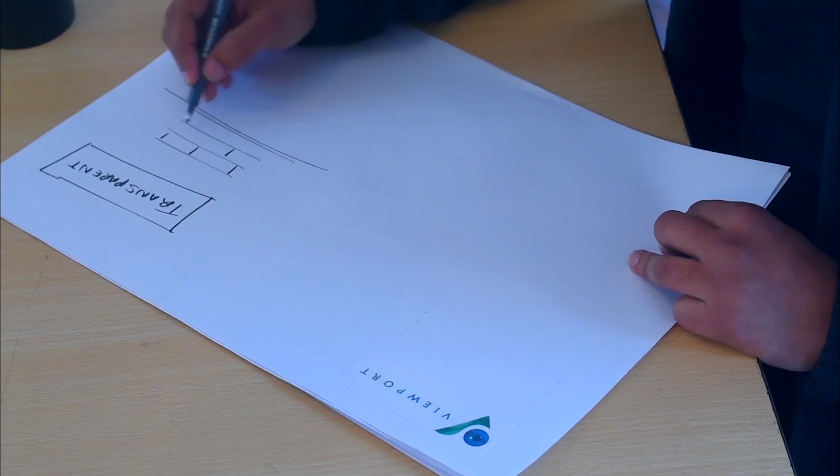जुनमा चाहिँ I wanted to explore with the materials, किनकि हामीले काठमाडौँमा या नेपालमा भनौँ न देख्दाखेरि चाहिँ fences are always these big walls of bricks, and they are all so monotonous. Maybe alikati naya element आयो भने चाहिँ there is a concrete band or maybe some barbed wires over it. I had to break this.

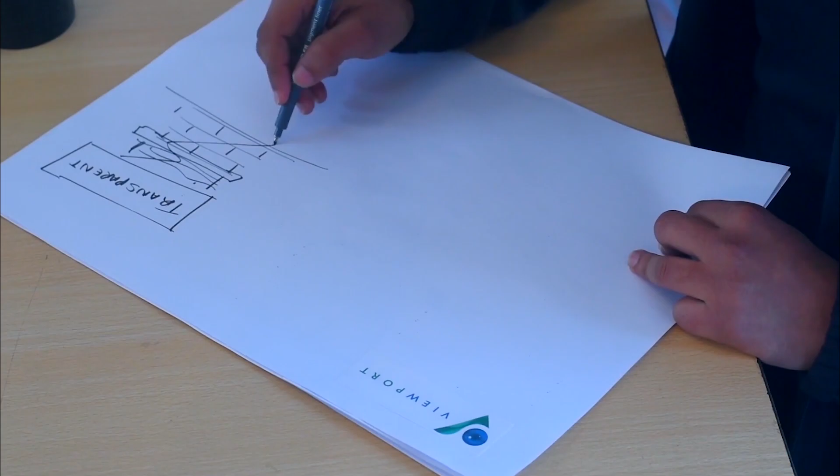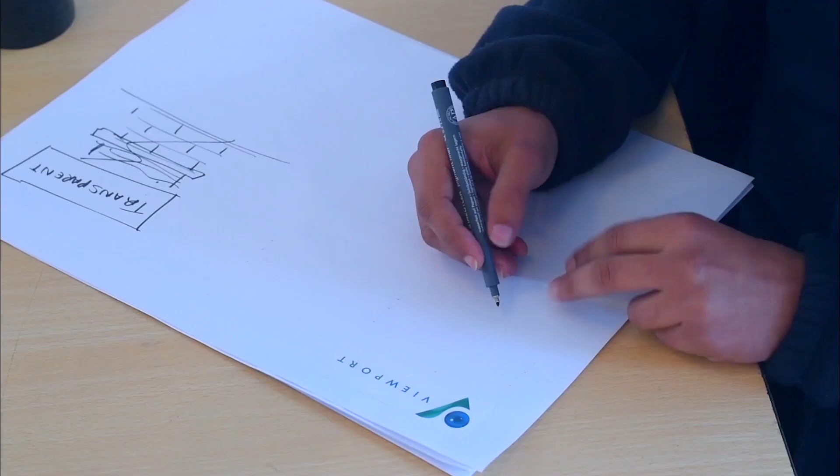अब यो break गर्ने कसरी भन्दाखेरि चाहिँ since we are in architecture school अनि the fence is in front of the architecture school, I wanted to bring out some creativity into it. अनि since it was my 4th year in architecture, मैले चाहिँ I looked back on my whole journey throughout the architecture school, and I felt like I had a really nice wave of life that had been going around the whole college.

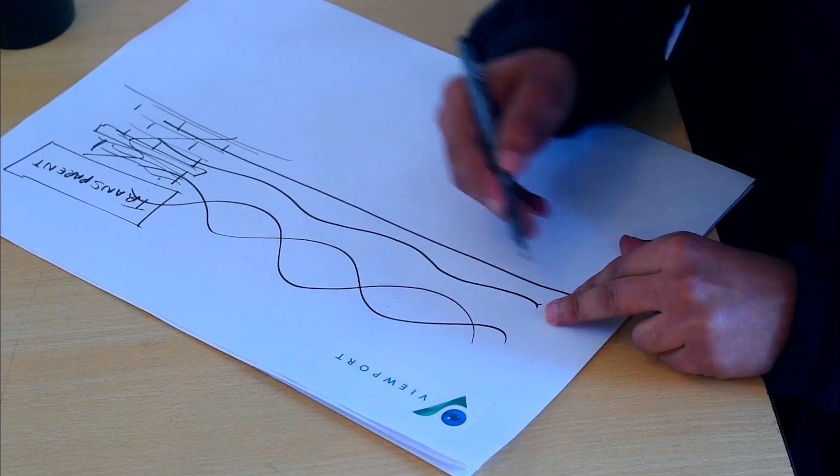There was also another wave of experience that was going when I was studying architecture in Pulchowk Campus. And I called it the wave of change, and then my whole design was based on that wave of change, where I added some more waves, and then this is what my core front view of the fence was.

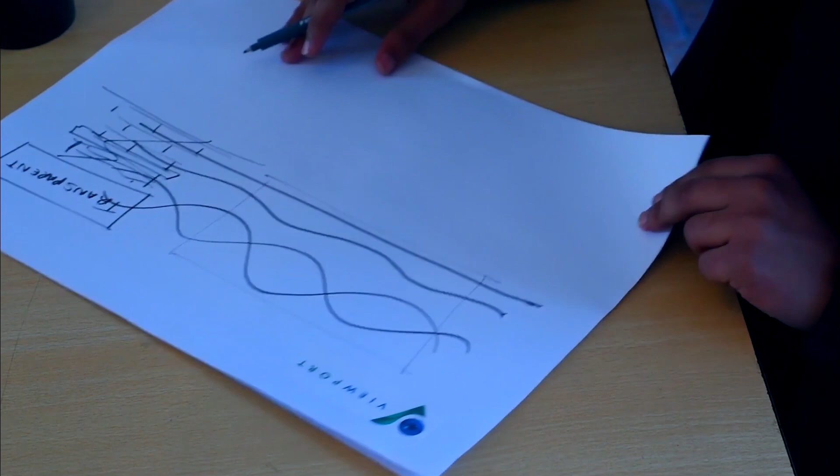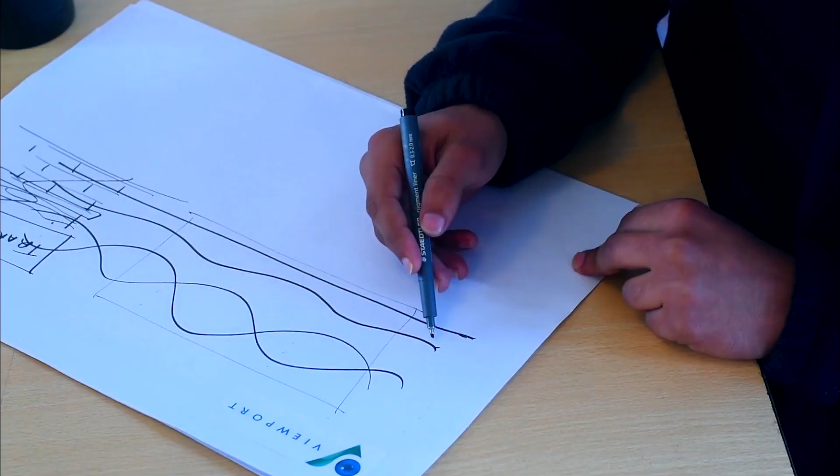त्यसपछि since I was going to add new materials to it instead of bricks, I searched into concretes and maybe steels. And there was another constraint by the organizers that the base of the fence has to be in stone. So यो सबै कुरालाई कम्बाइन गर्दाखेरि चाहिँ I had a feeling that I could make the structure like this through concrete, किनकि concrete is one of the flexible materials that is available in modern times.

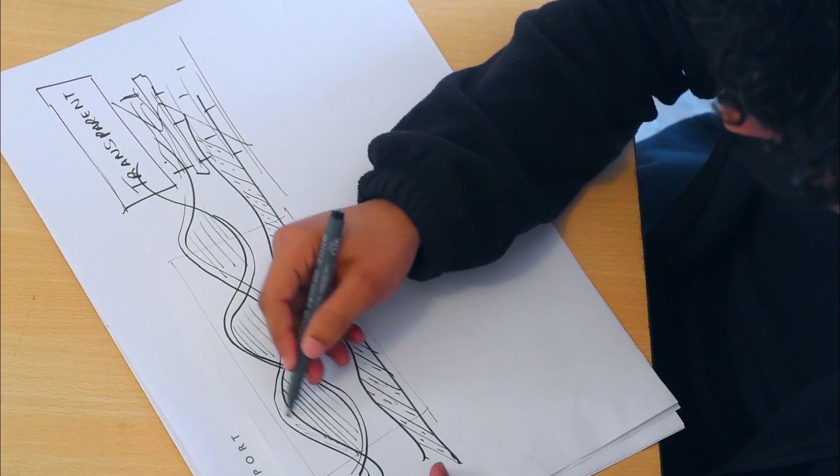So I had something that looked like a facade of my design.

These perfectly showed what's inside the fence and what's in the site itself. यसले गर्दाखेरि चाहिँ the pedestrians who are walking by could actually see what's inside.

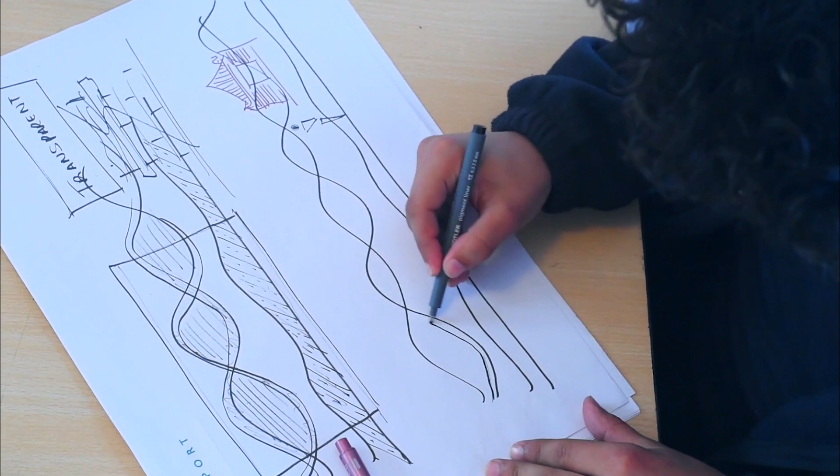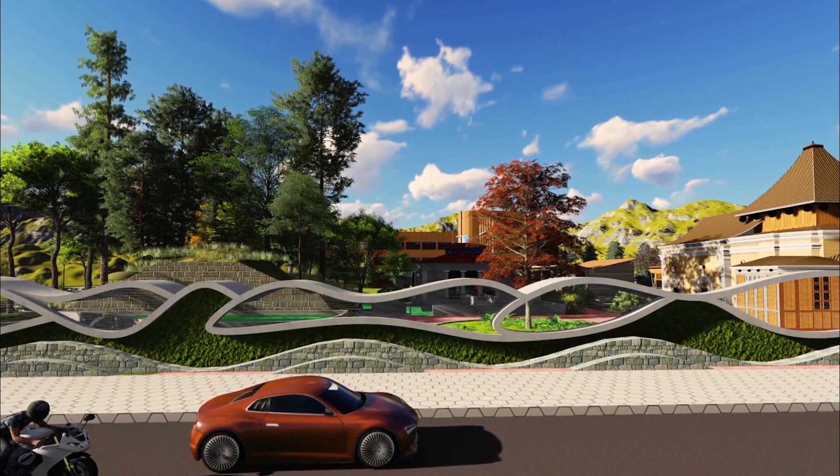Especially what I wanted to do was this: this is a concrete element that's coming that shows the wave, and then there's another concrete element that shows the wave again, and in this gap I decided to keep some horizontal steel members, cables let's say, which had the property of being transparent while giving the required amount of safety to the site.

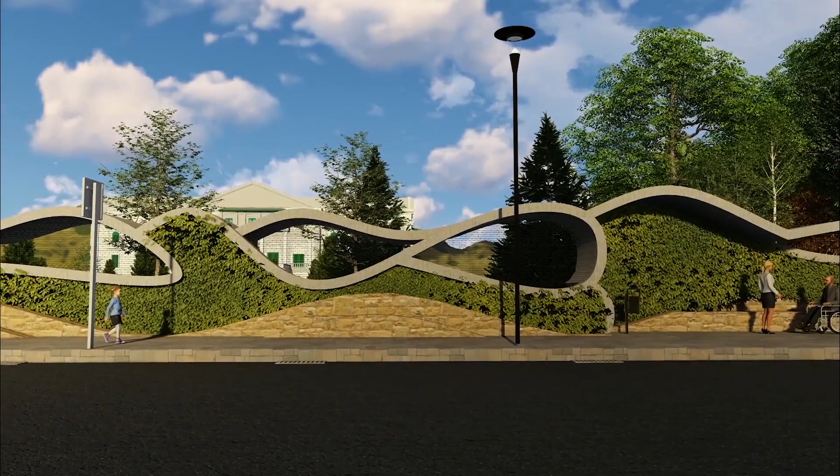And with the support of that mesh, there will be greeneries coming in the scene. So something like this, it's becoming a vertical garden, which pedestrians walking in front of the site could use as a visual element; seeing green while walking, it feels refreshing.

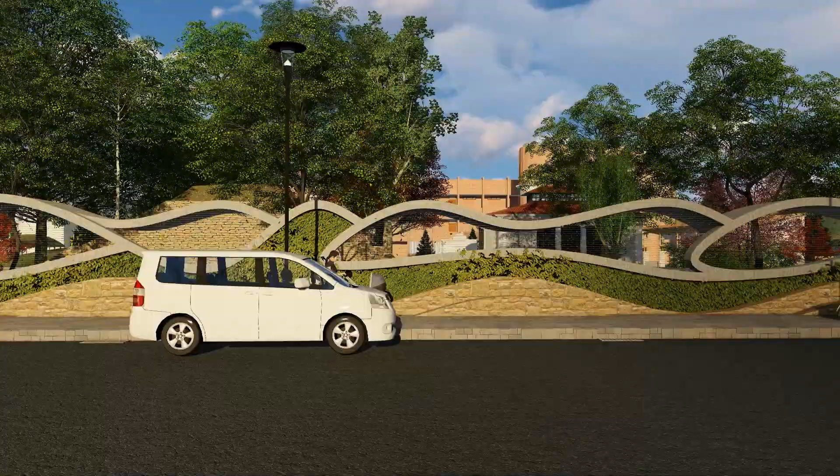Also our site has an existing amount of trees. There are a lot of trees inside, and since this is a transparent fencing, it shows that green feature of the site itself. So you could see green everywhere, something like this.

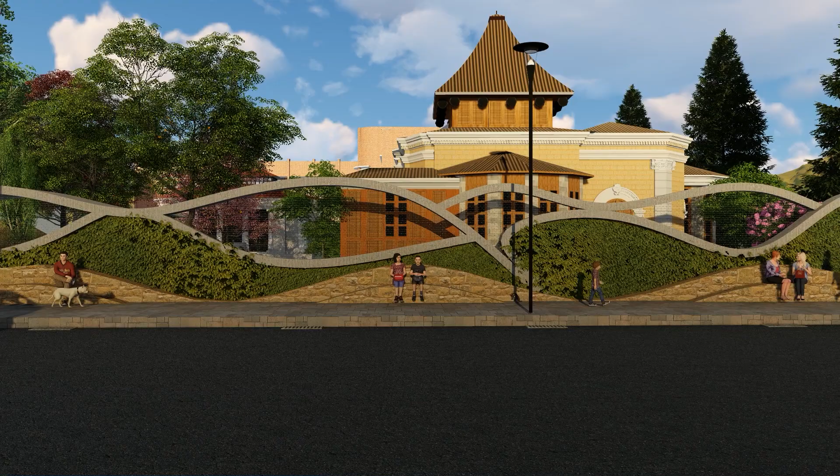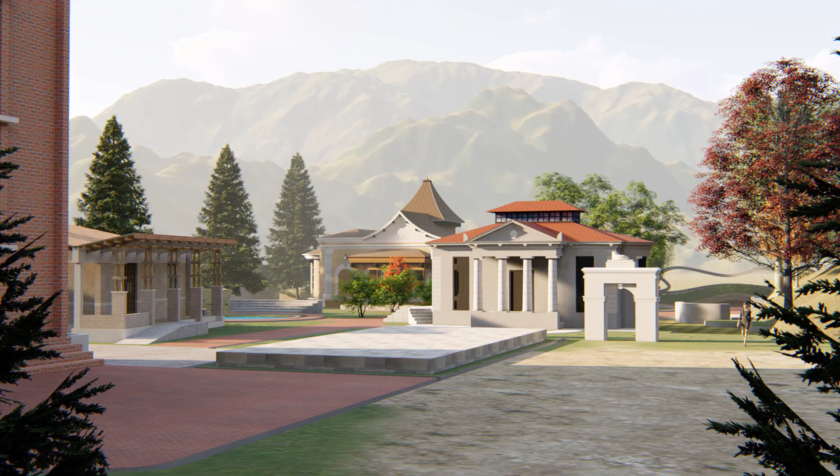Along with this, it's not just one pavilion; there are also many other buildings, like another building called the Summer Pavilion, made during the same era of Ananda Shamsher. This can also be seen from outside. Likewise, as an identity of Pulchowk Campus, there's the A block, the Ananda Niketan itself, which was Ananda Shamsher Rana's own residence.

That is also visible from outside, and this fence makes people able to see this building from the outside itself. So this can be an interesting element shown through the transparency of the fence.

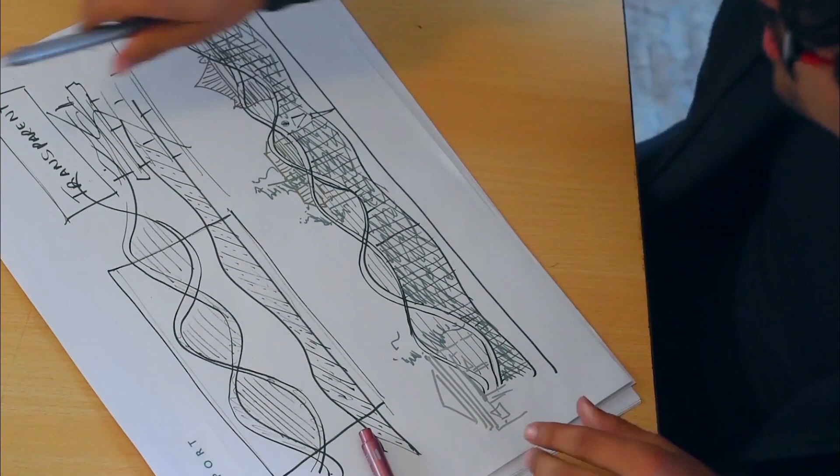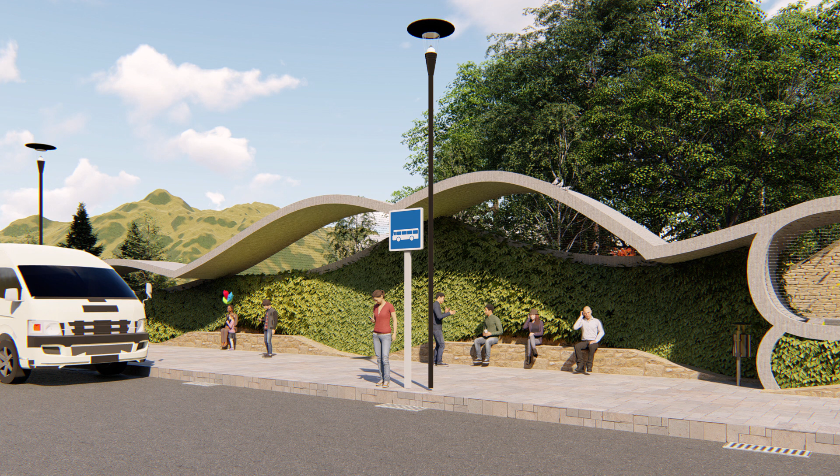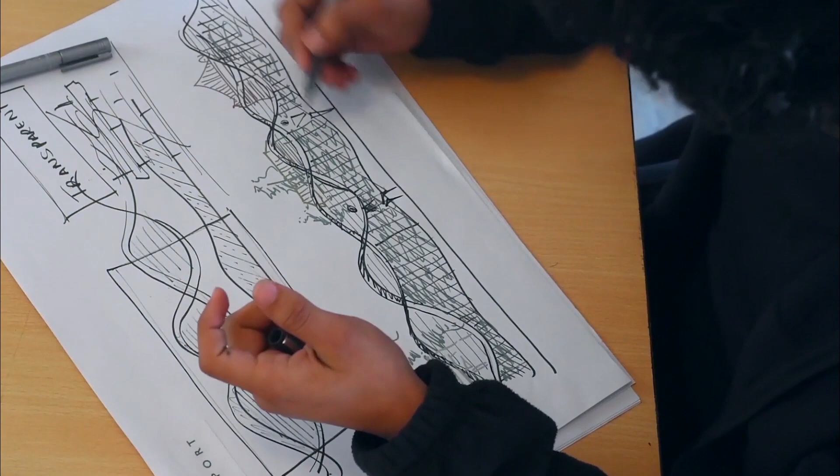Now these wave elements, what I did was I tried to incorporate them into some sort of shading device; they could protrude out of their own plane and form a shading for the people waiting for the bus. There's a bus stop of Krishna Galli right at the site, and I incorporated the fence into the bus stop where people can sit under the shade and wait for the bus, so we don't need a separate bus stop. So it's something like this.

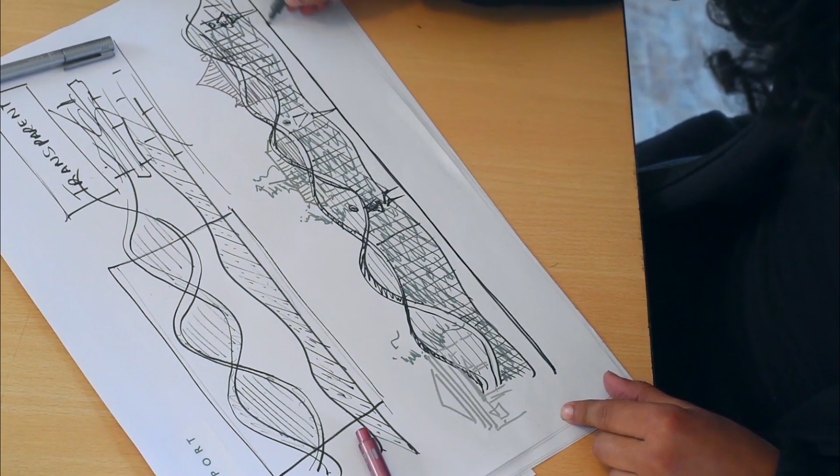So in this way I came up with this design where it is greener than what exists on the site. It shows what's inside the whole Department of Architecture. It shows the history of the change of era in Nepalese architecture.

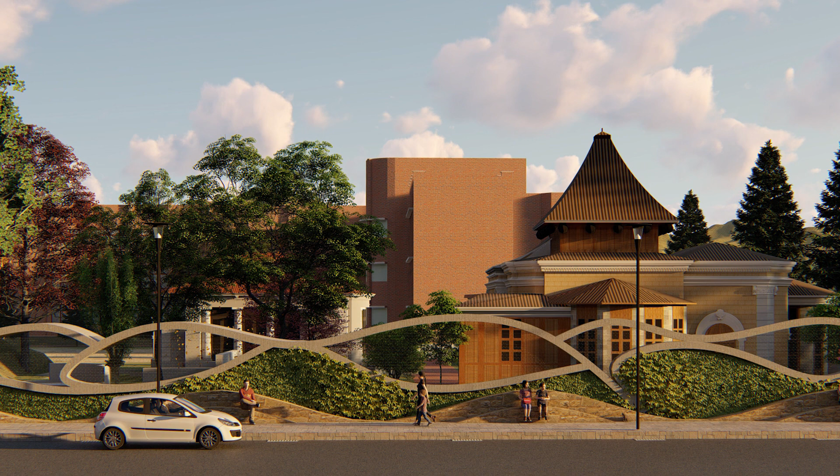So the core concept of the wave of change not only represents what a student feels from first year to the fourth or fifth year of his college journey, but also shows the whole journey of Nepalese architecture as a whole, which can be seen on the site itself, since the most modern part of the site is the Department of Architecture building behind. So there's a kind of timeline being formed through the fence and through what's in the background of the fence.

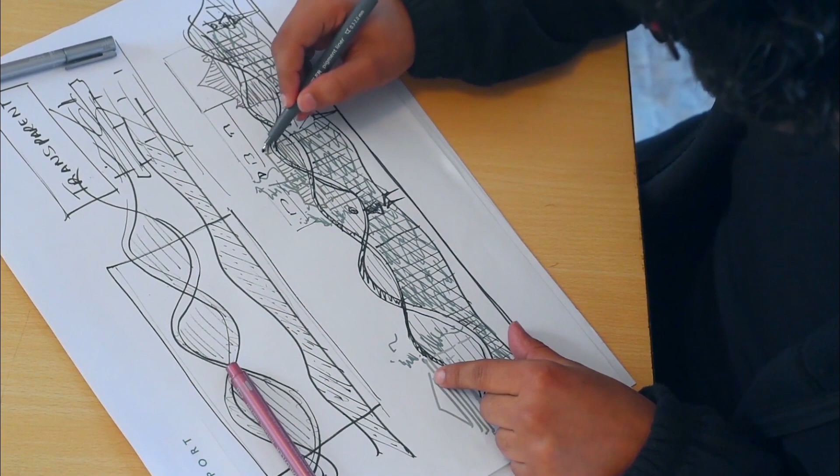So this design won the competition. The winning design was awarded the prize, and the prize was that this design would be implemented. Right now this is in the phase of government documentation, and they say it's going to be built on the whole site. So maybe in a few years we'll be able to see it built. So yeah, that's it.